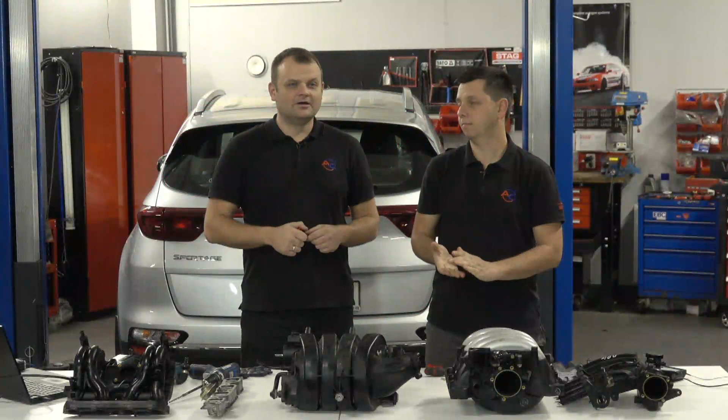The topics are the proper intake manifold nozzles montage, and the second one is the rules of the proper montage of the gas injectors in the manifold, outside the manifold.

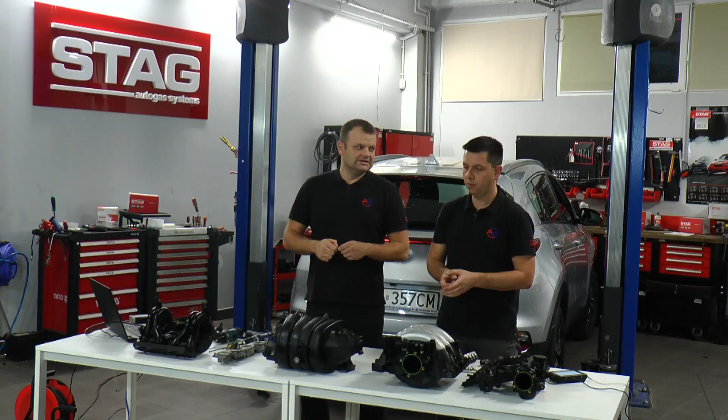And the first, the most important thing during conversion is that we need to deliver the gas to the combustion chamber in the proper way. What does it mean, proper way? It means that, depending on manifold construction, we should put the nozzles in the proper position, proper angle, and of course, LPG and CNG will be like a different way of thinking during this.

So what to do? Thomas, let's see slide number 2. Because it's good to look at the picture, because there are some basic parameters how to install, how to drill the nozzles. It is good to look at the picture and check. So at this moment you can see the two angles, angle alpha and angle beta.

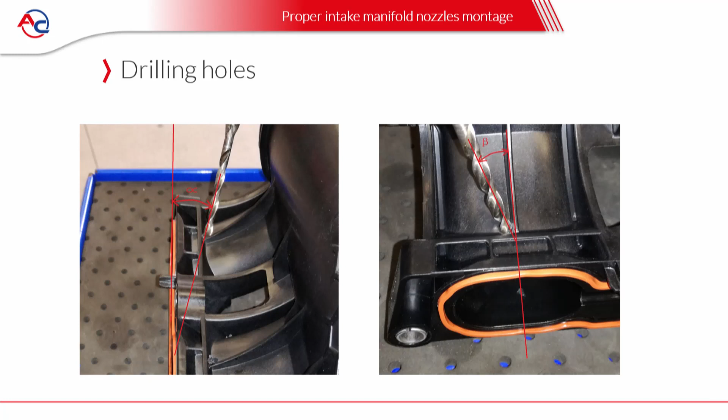These two angles are like the base rules. Let's talk about alpha. It's related to the position of the petrol injector in the manifold. As you see, this manifold is without the petrol injector. The petrol injector is in the head construction.

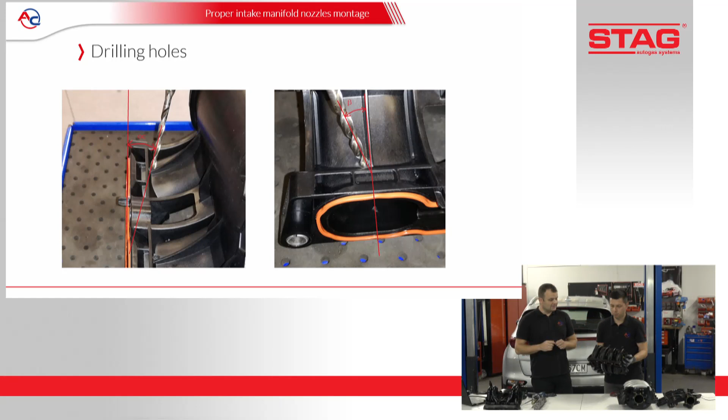So we should focus on the base rules, because in a situation when we have petrol injectors in the manifold, the nozzle in the manifold should be close to the angle of the petrol injector. So we have a manifold here. Let's have some small focus on it, please, just to show you the words that Marcin is saying.

For example, we have those places where we can find the petrol injectors right here; they are mounted on the manifold in this example. The first angle is related to the angle of the petrol injector. So this alpha angle should be very close to the angle of the petrol injector. This is like a first step. No matter if it is LPG or CNG gas, the angle is important.

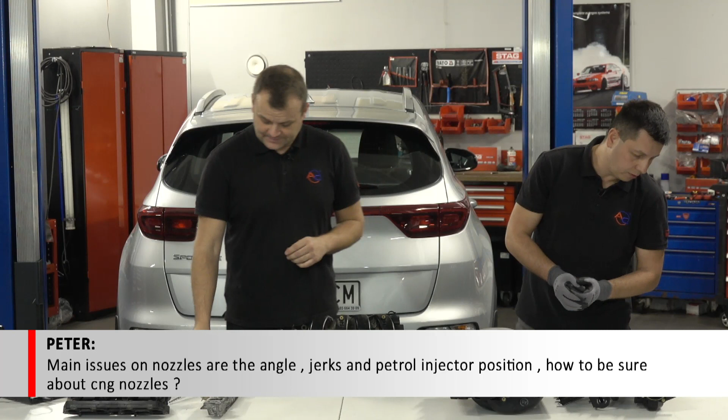The main difference between LPG and CNG is the place of the nozzle in the manifold. Before, we read one question. Peter is asking: main issues on nozzle are the angle, jerks and petrol injector position. How to be sure about the CNG nozzles? This is the difference between LPG and CNG nozzles.

In general, if you want to install the CNG system and you know how to install the LPG system, the main difference is in the distance between the place where you put the nozzles in the LPG system and in the CNG system. In general, LPG nozzles you should install closer to the head of the engine and the petrol injector.

But as Peter is asking about CNG, in the CNG system we should move the nozzles 10 to 15 centimeters from the petrol injector. This is a rule. Sometimes the customer has already mounted the nozzle, so there are some kind of software corrections that we can make in the software.

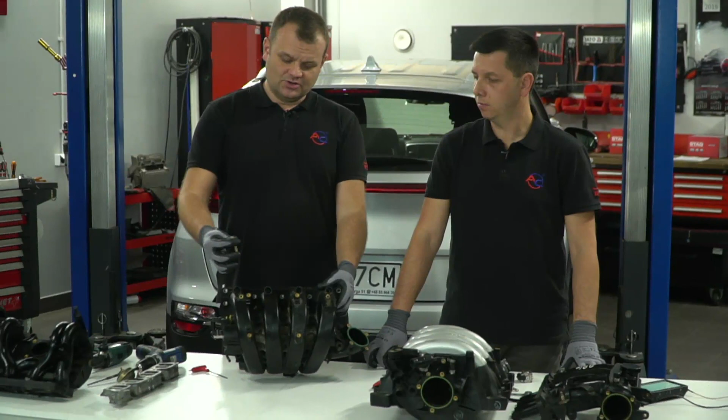But if the software is not enough and we still have some jerks, we should switch to a mechanical solution. So we should just move the nozzles. If they were drilled close to the petrol injector, we should move them 15 centimeters from the petrol injector.

Yes, this is a solution to prevent jerking during driving on CNG because of better mixing. Usually the CNG pressure is higher than LPG, and we have some turbulence when spraying the CNG, much more turbulent air inside the manifold. To prevent the jerking and get better mixing, just move the nozzles. Yes, that's the main answer to Peter's question.

Yes, this is the first step when we are talking about mechanical problems with the CNG system and installation of the CNG. So I think we'll present a small practical drilling of this manifold as an example. So what should we do at the stage of manifold drilling? First step, we need to analyze whether it is aluminum or plastic. If it's plastic, sometimes it's not necessary to dismount the manifold from the engine.

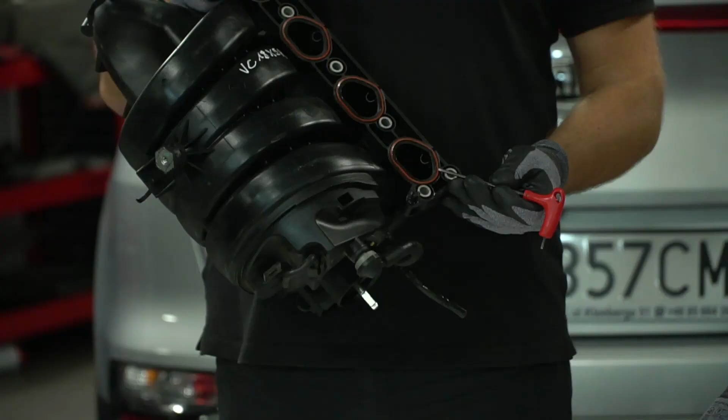But what is the reason why we should do this? Just an example like this. Without knowing what is on the side of the head, we are not sure during drilling in the engine compartment that we won't, for example, damage the sealing. That's why it's better to move it out of the engine compartment.

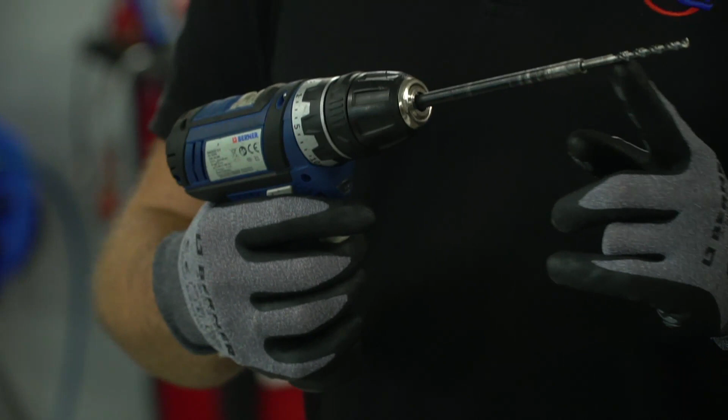That's right. And the second thing is there are some tools, yes? First of all, we need to drill, right? So what we should have is a drilling tool. The drilling tool, as you see, is untypical. You cannot buy this kind of drill in the shop. This is a custom made drill. This is the typical drilling tool, and this was added in a special workshop.

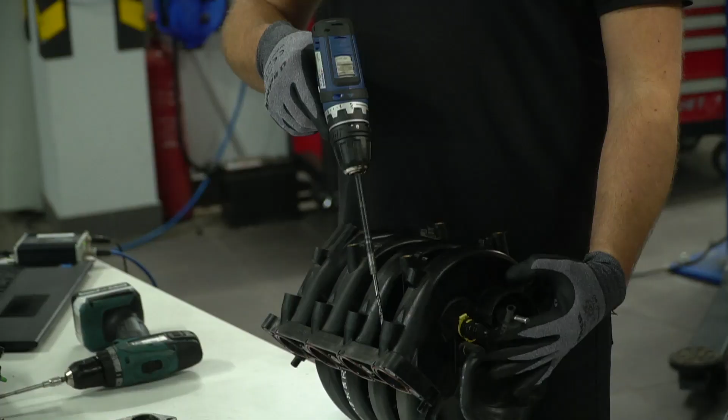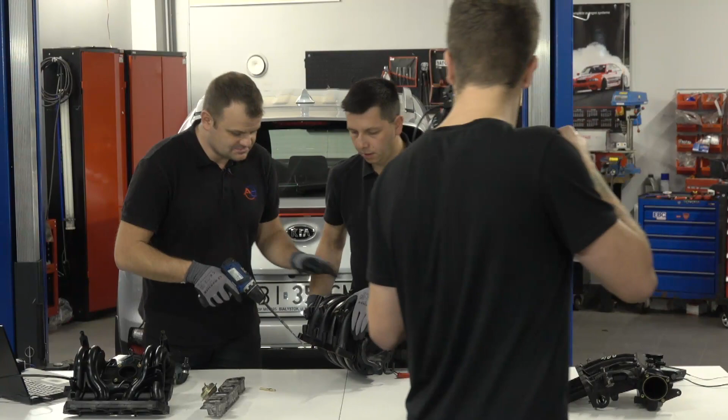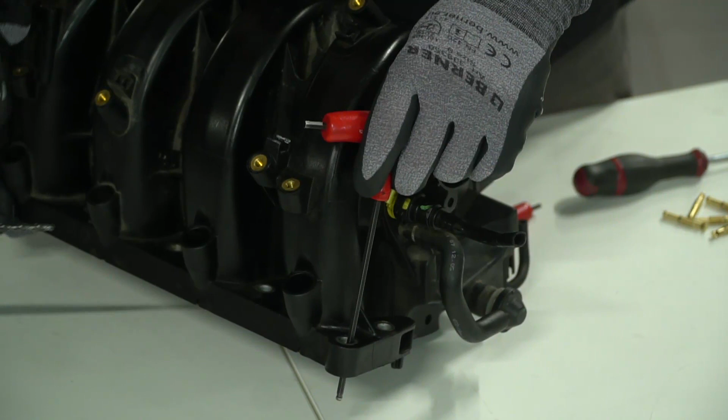Please, Tom, hold the manifold. Okay. Another thing you need to think about is what will happen if we drill here. Keep in mind that after drilling, you should also put the nozzle in this place. When we have a screw here to mount the manifold, if after drilling we put the nozzle on the left side, for example, there will be a problem mounting the manifold back to the engine. That's why we should go on the opposite side and drill.

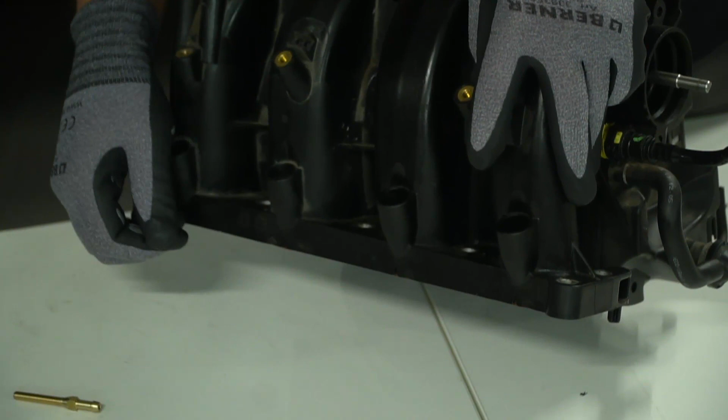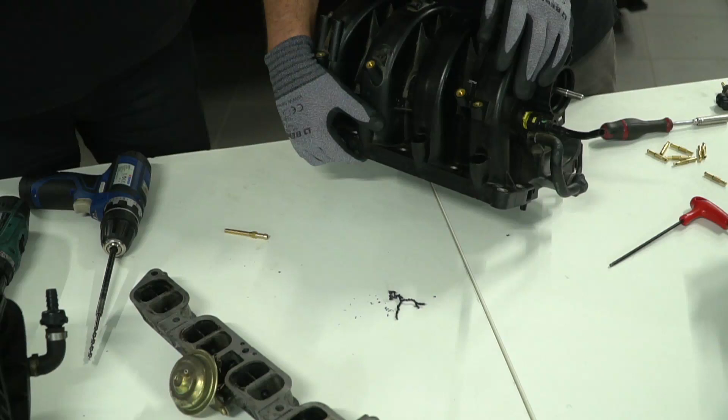But if we drill aluminium, we'll show you the aluminium dust. It can create a lot of damage in the engine, related to the catalyst, even clogging on the valve seats or the valve, and a lot of issues with starting the engine after this. That's why, again, remove the manifold from the engine. So right now we have a hole here.

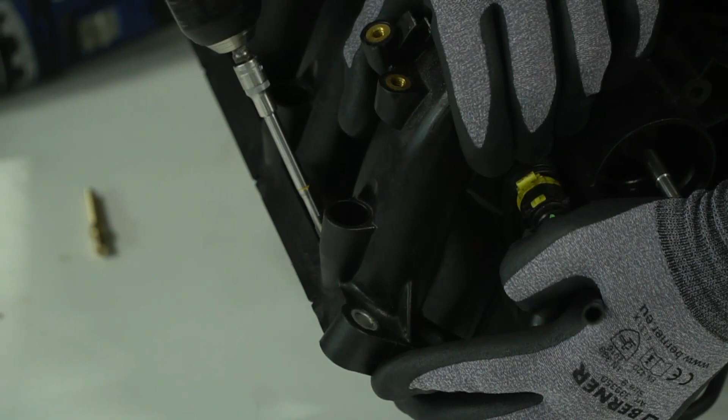Now we can try to put the nozzle here. But to put the nozzle in, as you can see, the nozzle has a thread. So we need to cut the thread in the manifold. Step back, slow down the machine from second gear to first gear to have slow movement, and then at the same angle, slowly make the thread in the manifold. Move it right, then the opposite side, take it back, and we have the thread in the manifold.

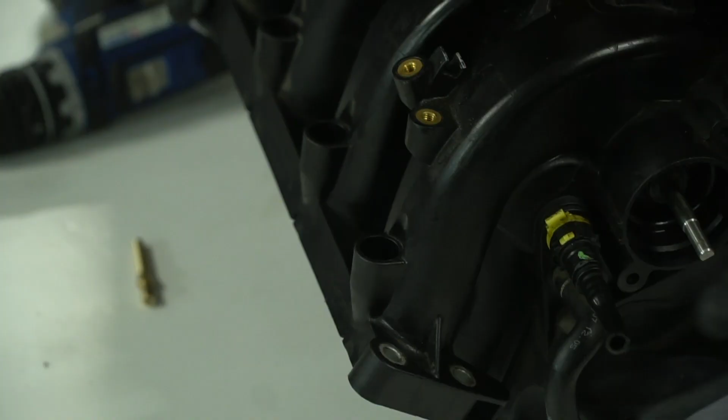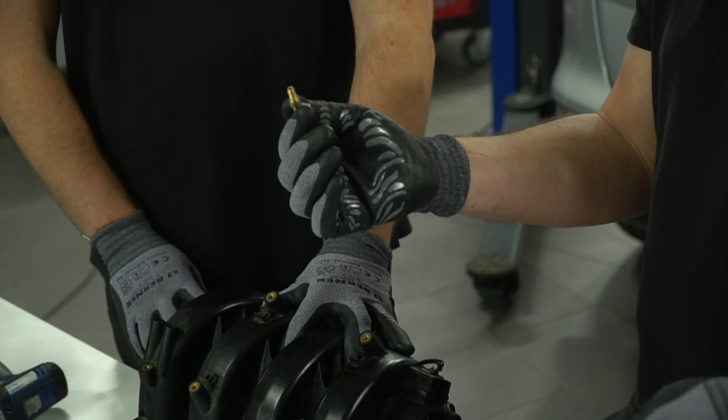That's right. So now, when we have the thread and the nozzle hole here, we can use the nozzle. As you can see, we prepared different types of nozzles. This is the typical nozzle you can usually find on the market, and it is also included in many injector kits. But we can also have nozzles like this one. As you can see, it's much longer. It depends on the construction of the manifold.

You can use the shorter one or the longer one. And the third one you can also find on the market is a directional nozzle. We will also tell you later more details on the different solutions.

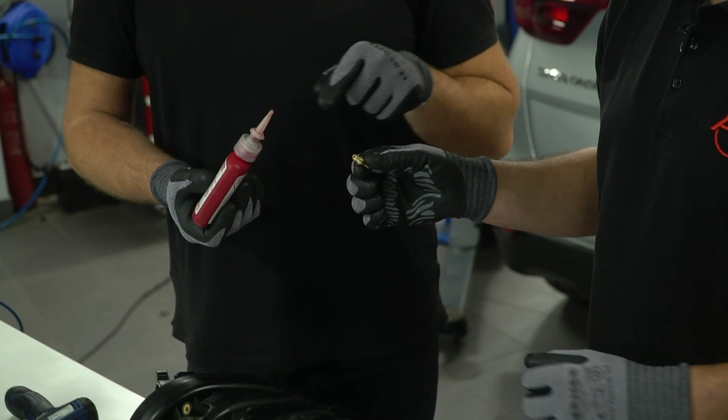And the next tool we need is a thread sealing liquid. Yes, it is very important to use this liquid as the first step, but not to overfill it. What is the reason? Because sometimes if there is a lot of liquid when mounting the nozzle in the manifold, we can clog the nozzle flow.

And then we made the installation. We think that everything is okay, but suddenly the car has a malfunction, the engine is not working properly, some misfire on one cylinder, second, third.

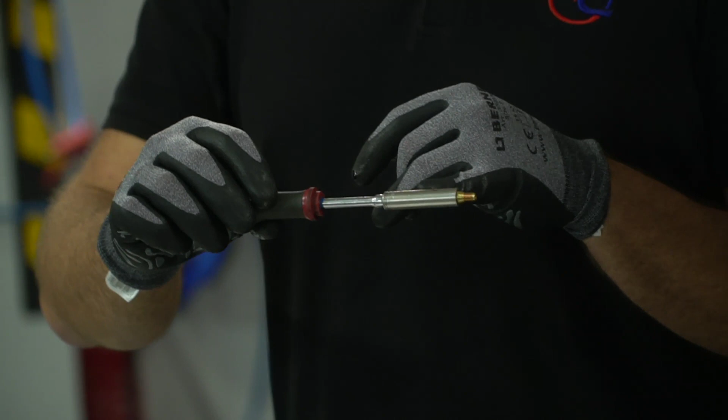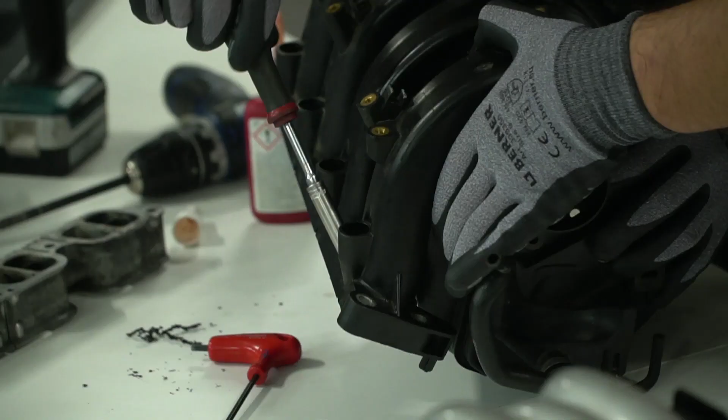Then for the nozzle we should have an 8mm tool similar to this, and if we have the sealing liquid on it, can we have a focus here, we can easily mount the nozzle in the manifold. And don't use too much torque on the screw, because with this type of plastic body we can destroy the manifold. We can crack the manifold.

So this kind of tool is useful, because if you use a wrench, the torque can be too high and we can crack the manifold. Better is to use a screwdriver-type tool. And if you feel gently that the thread is going to the end, it's finished. That's the rule. So we can show you the focus, how the nozzle is mounted.

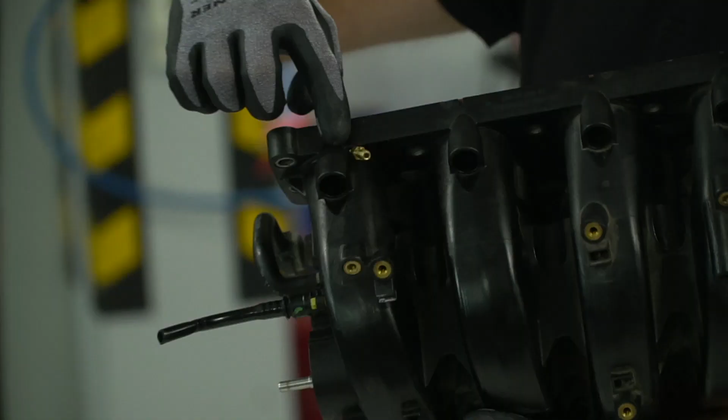And on the opposite side, if we have a focus, the output of the nozzle is very close to the output of the petrol injector hole, you can see. Okay.

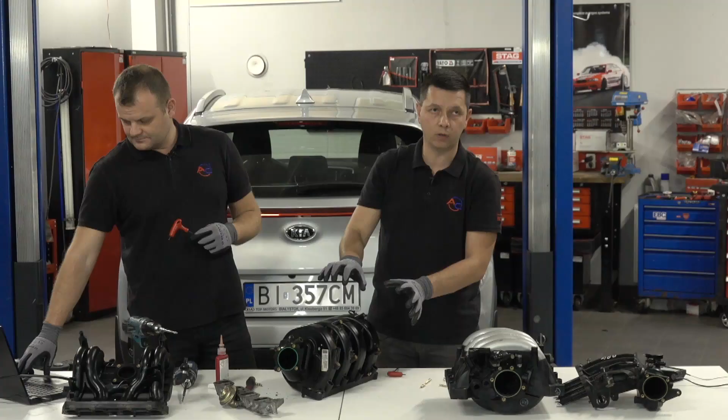When installing the nozzles in the manifold, it is also important to check the whole construction of the engine, because sometimes the manifold has a plastic cover on it. So it's very important to check the proper position for the nozzles, so there is no problem putting the plastic top on the manifold. It's one of the things you should take into consideration.

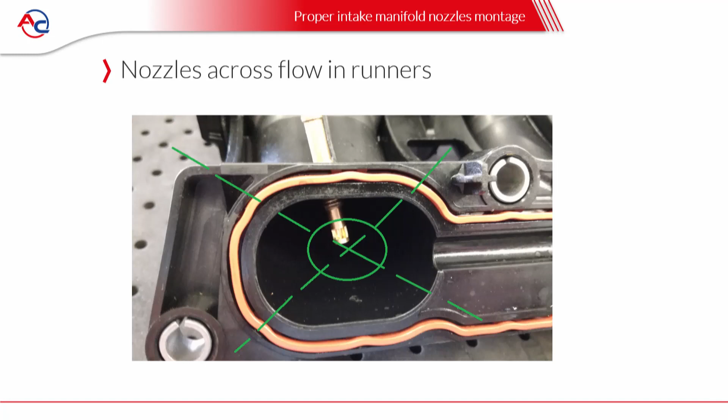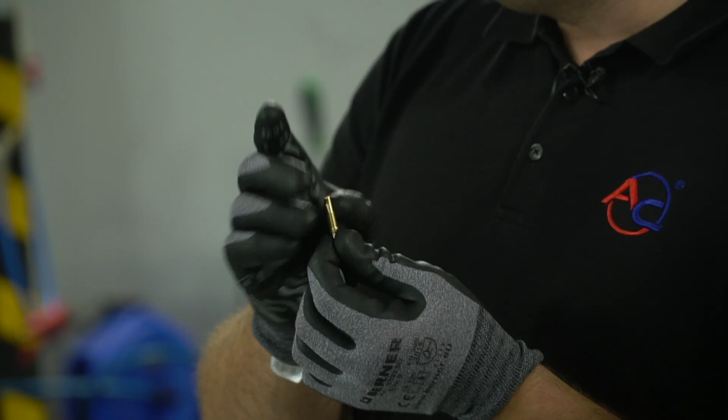On the screen, we can show you one more screen related to the position of the directional nozzle. As you see, the directional nozzle has a small output, but only on one side of the construction. If you see the screen now, please. The output is as close as possible to the middle of the geometric construction of the runner. As you see, it's very close to the middle area.

And the reason is that in the geometric middle of the runner, the flow is more laminar. Close to the border, the flow is more turbulent, and the mixing is not so smooth.

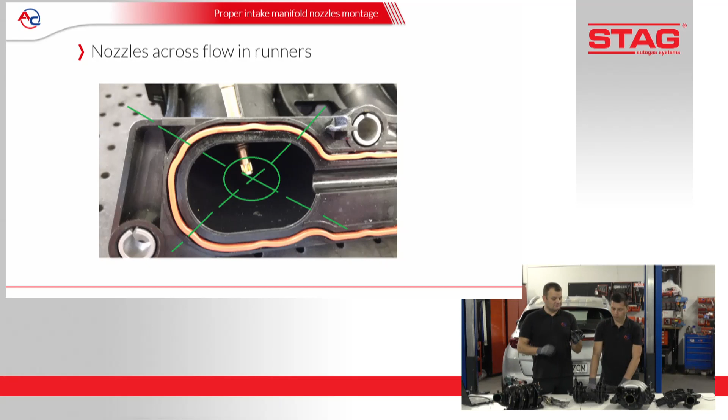That's the reason, if possible for an engine like this, because the manifold on the screen is from a direct injection engine, where the petrol strategy is more complicated, so to prevent jerks and have better mixing, in those kinds of engines use nozzles with a directional hole output.

And just to show you, what do you think, Marcin, we can make a hole in this manifold, for example at 90 degrees, and install the directional nozzle to see how it looks. So we have the manifold right here. We have taken it off the engine head. As we can see, there are no flaps here, and no petrol injectors, that's right. So we decided to put the nozzles in this manifold.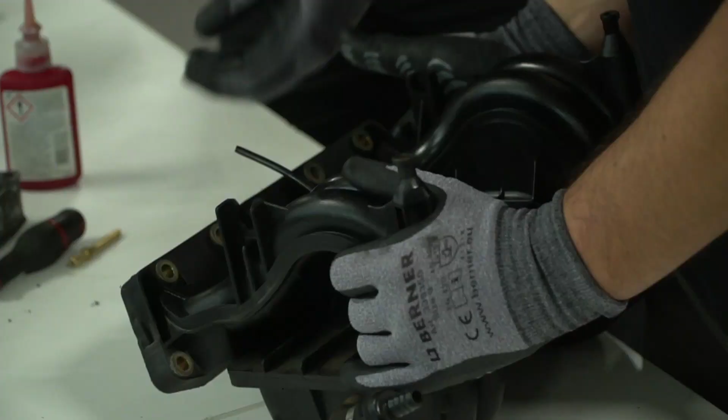Okay. Because of what Marcin said just before, maybe we can use the directional nozzles, just to show. Okay, let's do it. Let's drill it. Okay, let's try it. Okay, and now we make the hole. The second thing is to make the thread.

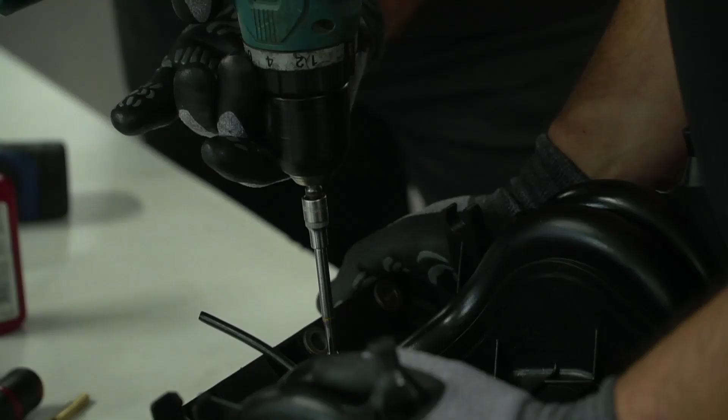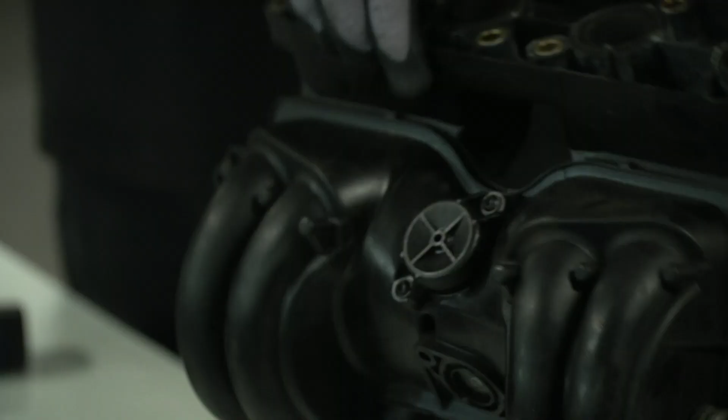Okay, and now just to see the example, if we want to put the standard nozzles here, right now without the glue, just to show you what is the difference, right? This is only the example. As you can see in this situation, it doesn't even show. Just a little bit, and the direction. Maybe show it for the camera, how it looks.

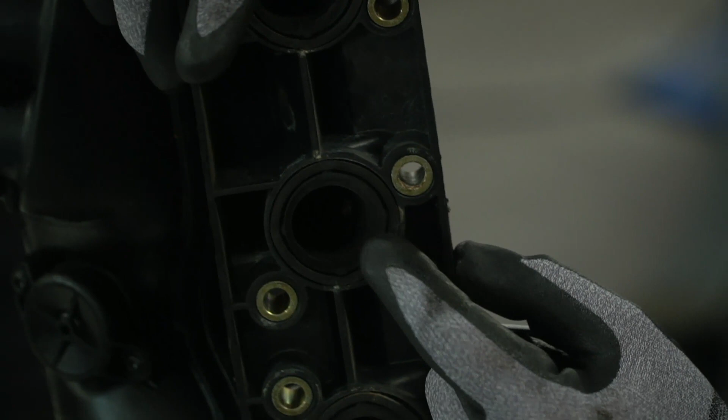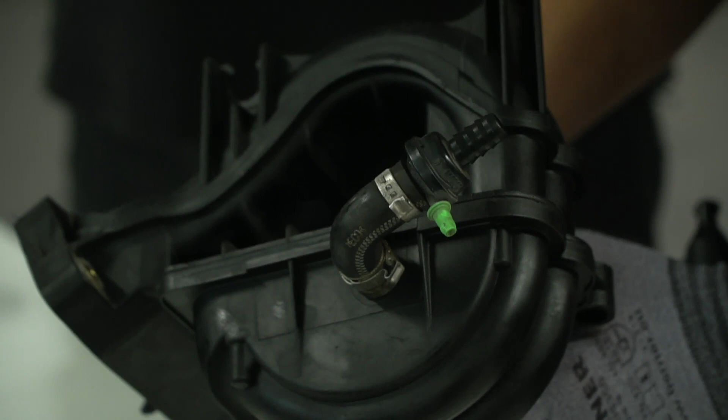Yes, here we have the nozzle inside. Okay, so the injection of the gas is going to that wall, right? It will hit the wall, and after hitting the wall go out. So in this situation, we can try to install the directional nozzle. And before installation, show how the nozzle looks from the top, please.

So right now we have the nozzle that looks like this, and from the top, as you can see, there is a little cut, a small mark on the nozzle. It is very important, because this mark on the top of the nozzle has the same direction as the hole here. So when you install the nozzle, you can easily find the proper angle and position. You will be sure about the output of the nozzle.

And once again, we should use the wrench. Which one is this? This one. Take it on a wrench. Then I will glue it and you will screw it. Okay.

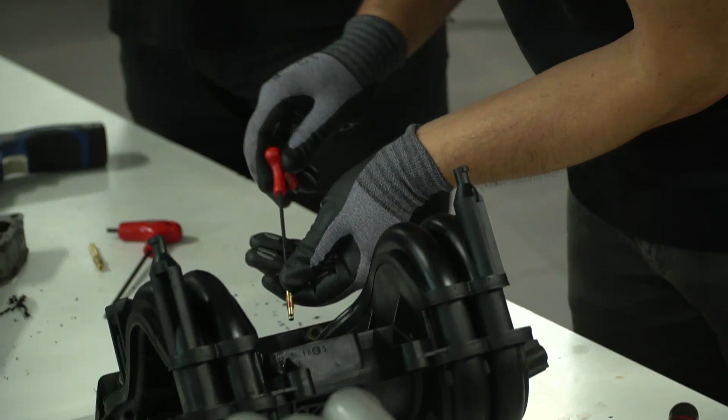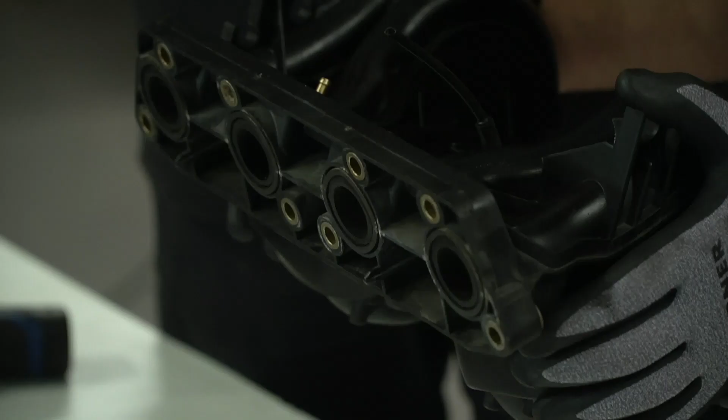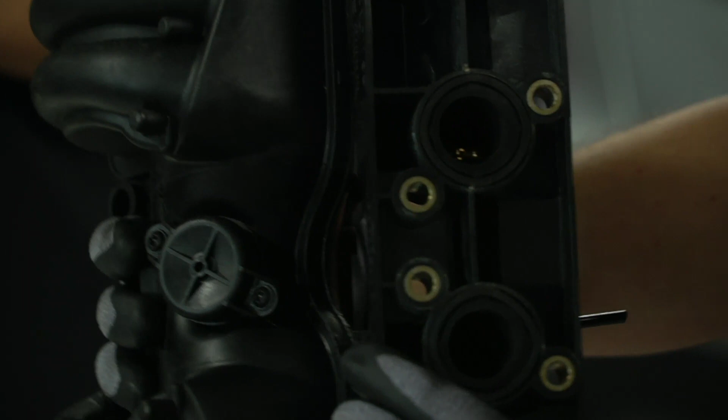but when you look down here, you can see that output with the proper angle. And right now, when the system injects gas, the direction of the gas will be just in line with the runner. So we are very sure that in this situation it will be a very good direction of gas flow.

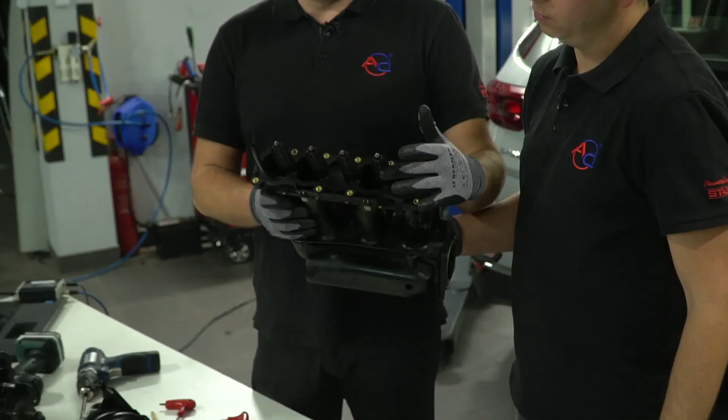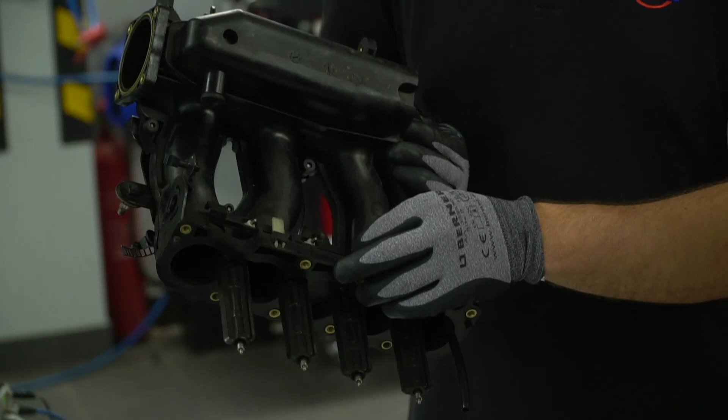So these are, let's call them, more simple solutions. Then we can step to a little bit more complicated manifold, this one. What is unique is that at the airflow outputs there are additional flaps inside. If you look from outside when it's mounted in the engine, there is no sign of these flaps because they're built into the back of the manifold construction. There are extra handles there. From the top we cannot even see the flaps inside.

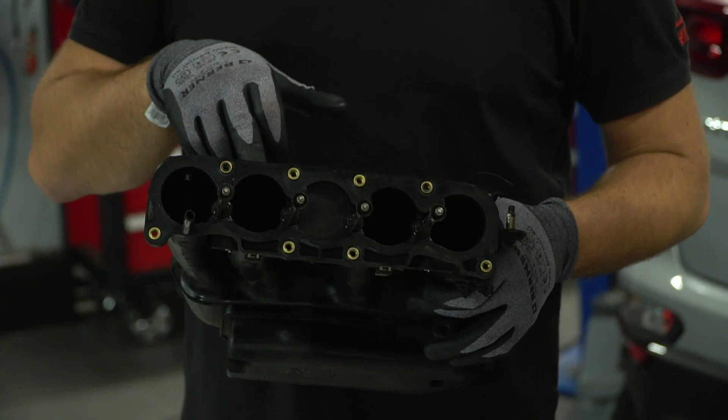So if you remove the manifold you can see the flaps. If you put typical nozzles here, there will be output of air together with mixed gas. There is a high risk that if the flaps are open, we'll be mixing the gas of all 4 cylinders with air. We are 100% sure this engine will not work properly without this additional knowledge. Probably the engine will not even run stable at idle, and there will be a lot of jerks and more problems.

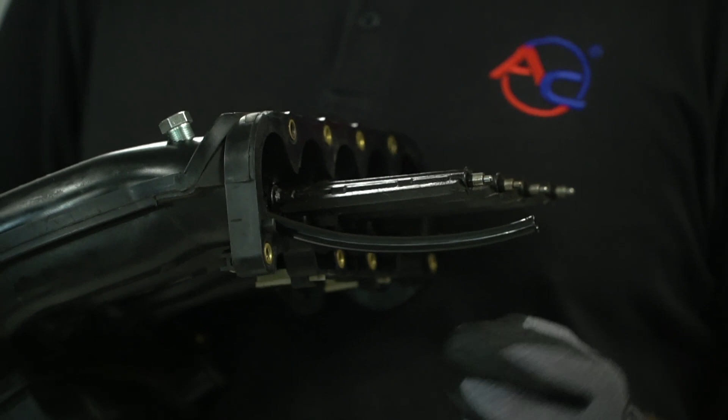So after dismounting the manifold, the one proper solution for this engine is to mount additional plastic extenders for the nozzles. Then, after mounting this manifold, the gas flow through this piping will go as close as possible to the intake valve, and there will be no mixing; whether the flaps are open or closed, the gas will flow out through these plastic nozzles. In many markets we can buy these plastic extension nozzles.

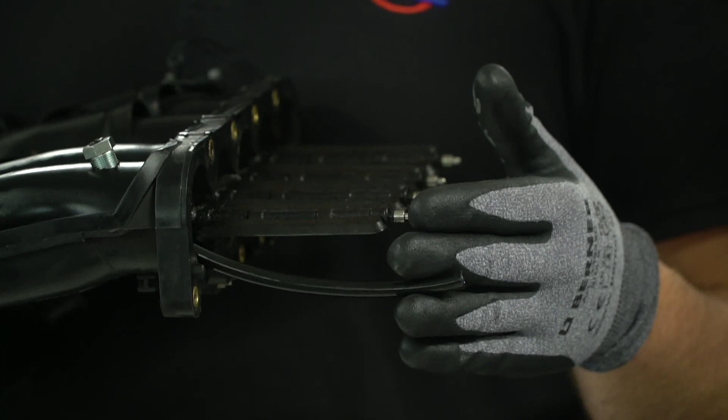Some engines have no vacuum in the manifold, like Valvematic or Valvetronic engines in Toyota and BMW. In these cases we also suggest using this kind of nozzle, because without vacuum in the manifold, with typical nozzles, we sometimes see jerking, even on LPG. With the plastic nozzles mounted in the manifold, we can fix these issues easily.

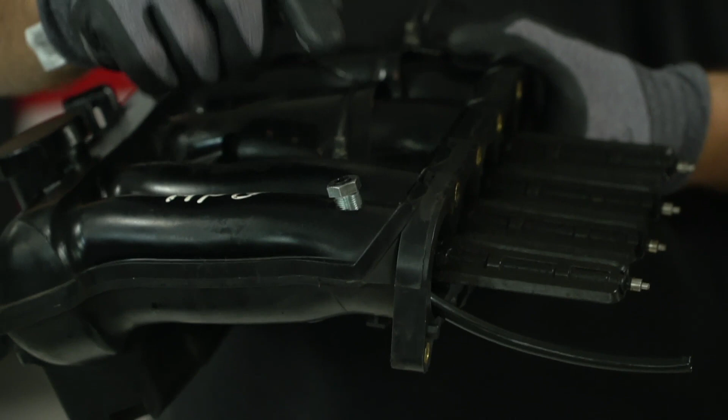It's not complicated, and not so expensive: €1-2 maximum per nozzle. So in the overall cost of installation, €1 or €2 is not too much. Also, the work during installation is very simple: just drill the hole, use the standard metal sleeve, put the plastic pipe inside this metal sleeve, tighten it, and then connect the pipe from the injector to this nozzle using typical rubber hoses, nothing more.

Yes, that's right, and it's also important that you can change the extension by cutting, depending on how long it can be. These pipes can also be slightly modified at high temperature, so we can use an external heat source and change the shape of this plastic pipe a little. That's right. It's flexible, so it can be easily mixed and fixed, like this.

This is a solution. So let's follow the next steps, which are more complicated. We can show you a very short manifold element from a Toyota 2-liter engine. From the typical layout you don't even see that inside the manifold we can meet the flaps. Each cylinder has a small flap. But if you see it in the engine compartment without taking it out, you are not sure in which place it should be mounted. Every cylinder, as you can see, has two lines or rows, where the air goes through two runners from the manifold to the engine.

And here, just like Marcin said, if you do not take off the manifold, you can think, maybe we can drill here, the second one maybe here, and maybe here. So first, we can break the flaps, of course. Or we can block the flaps, because if we drill and put the nozzles here, the nozzle can block the flap. So what to do? After dismounting, we should choose a proper runner. As you see, there will be runners number 2, 4, 6, 8. There will be 4 runners.

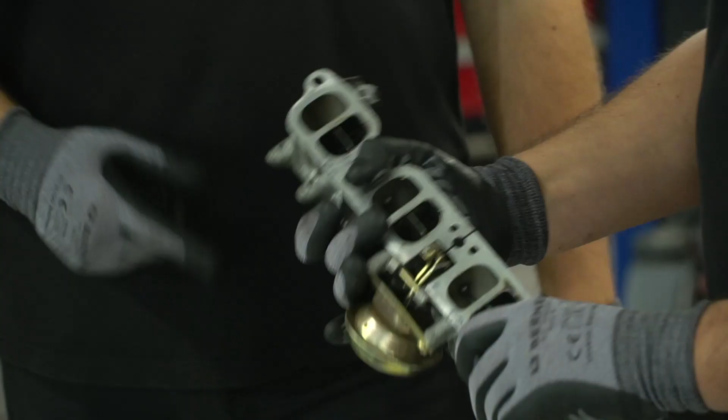What to do? We suggest using direction nozzles in this case. And let's try to generate dust, aluminum dust, and you will see how much dust will be generated. Can you hold it? I will do it. Yes, of course. Which one do you choose? Maybe here? Okay, let's try. Let's see this. Without dismounting, see what we will generate, and we will have it in the engine. To prevent it, dismount the manifold. Then, the same rule, we should make a thread.

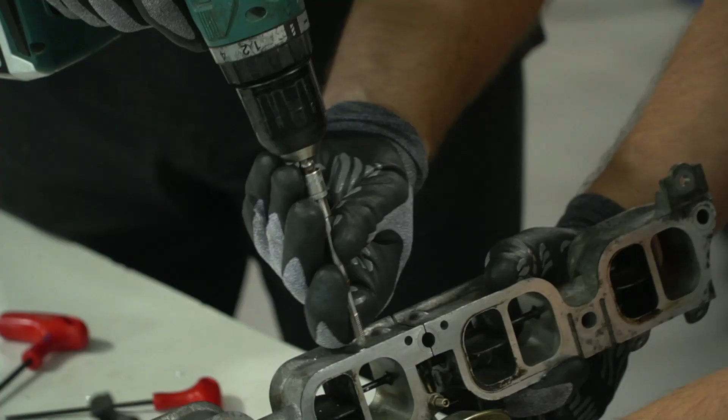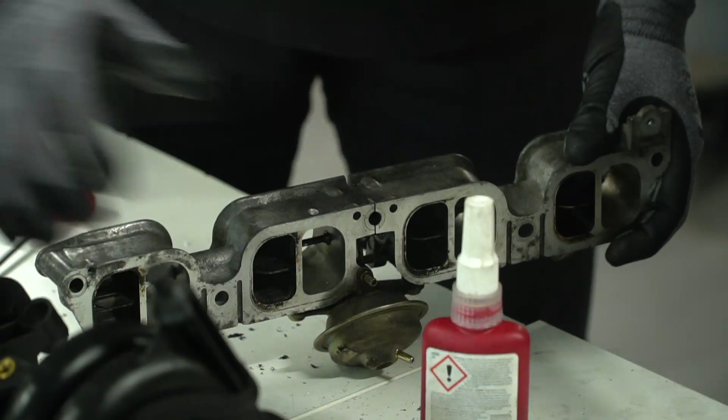Again, as you can see, during making the thread you still have the dust that is here. So dismount the manifold. Okay, then I will hold. You can install the direction nozzle. Once again, we need to take some Loctite. Just remember to close it.

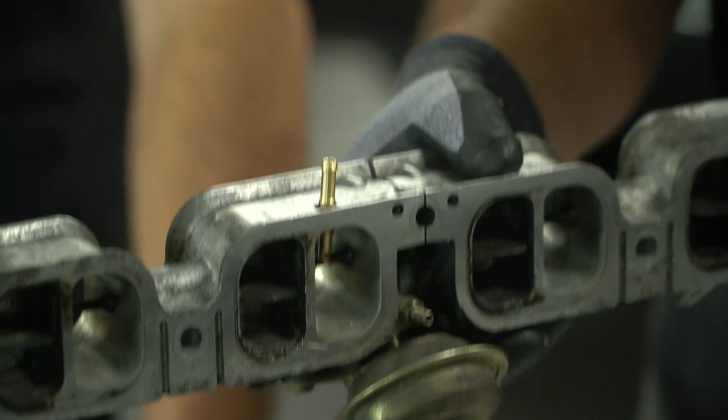Okay. And the same rule for the direction of the nozzle: you should put the markings on the engine side. As you can see right now, there is a directional nozzle here in the manifold, and the direction of the gas flow is the same direction that the air is going from the filter, through the manifold, to the head of the engine. So again, the advantage of the direction nozzle is you don't need to take care a lot about the angle. Because it is straight in the runner, the gas output is inside the runner,

in the geometric middle of the runner. So there are 2 or 3 things you don't need to think about, because the output is in the middle of the runner. As you can see, if you put it in the wrong place, when you try to close and open the flaps, that nozzle will be a problem for the proper working of the flaps. Exactly. So from this, we can switch to a V6 engine manifold, this big one. What can be an issue on V6? Of course, the issue can be the same.

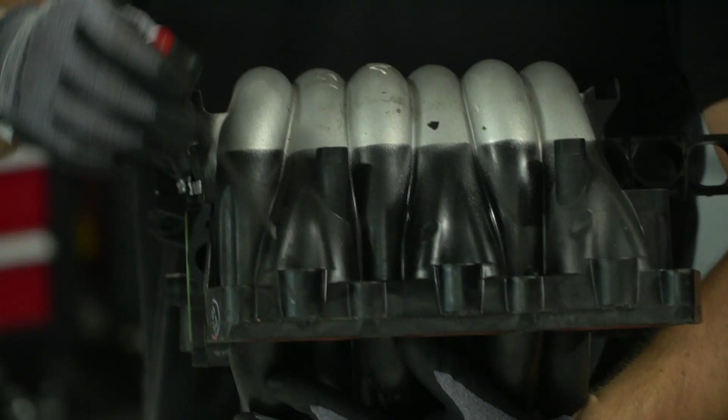We can meet flaps, we can meet double flaps in the runner, and sometimes we meet another problem. Let's see this. If we have a 1-cylinder runner, we have a second runner very close, like here, and sometimes these 2 runners can be in one surface. Here, as you see, there is one surface with this angle and a second surface. But sometimes the surface is flat, in the same line, and during drilling we can damage this runner, and this runner goes to the opposite bank.

Yes, this is bank 1, cylinders 1, 2, 3, and bank 2, cylinders 4, 5, 6. So sometimes during the drilling we can meet an issue with destroying the wall of another cylinder runner. This can be an issue. So what to do? We need to focus on the 6-cylinder runners and manifolds like this. So drill it again close to the petrol injector. Then we are also sure that we cannot have broken another cylinder runner, like here.

In this particular manifold this is simple, because we see the runners. But sometimes the surface is flat, and during the drilling we can destroy another cylinder runner. This is a main issue in V6 engines. And another issue is that there is a lot of work to do if we have a V6 and we are using injector rails, not single injectors.

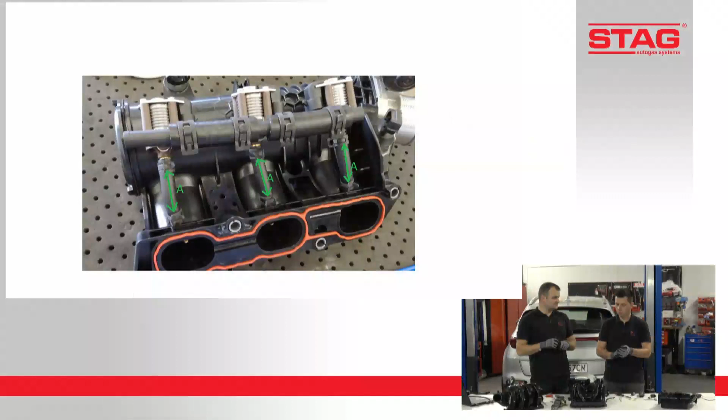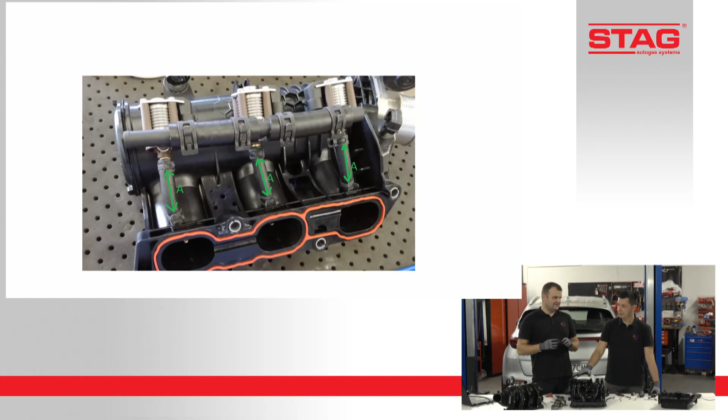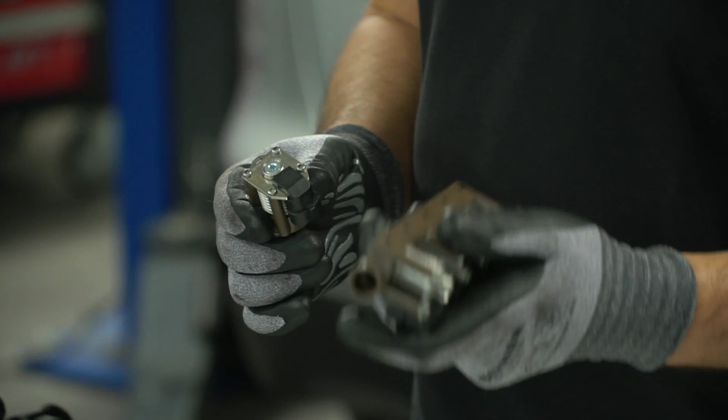So again, we need to repeat it: A means that all pipes should be of length A, the same length for each pipe. And since we are talking about the installation, we can say some words about the position of the injectors, because it's also a very important thing. As you can see, we have access to the injector rail and a single particular injector.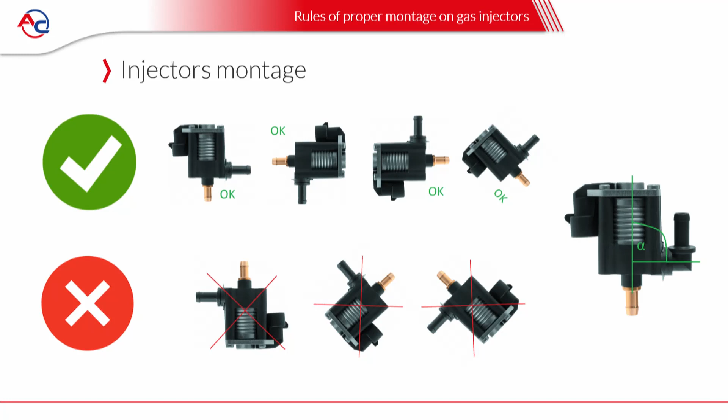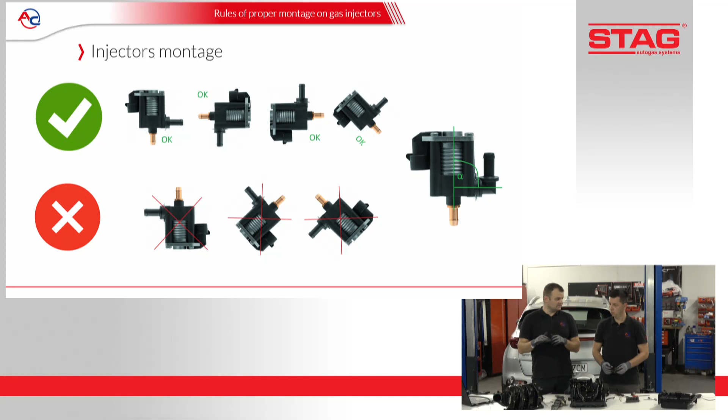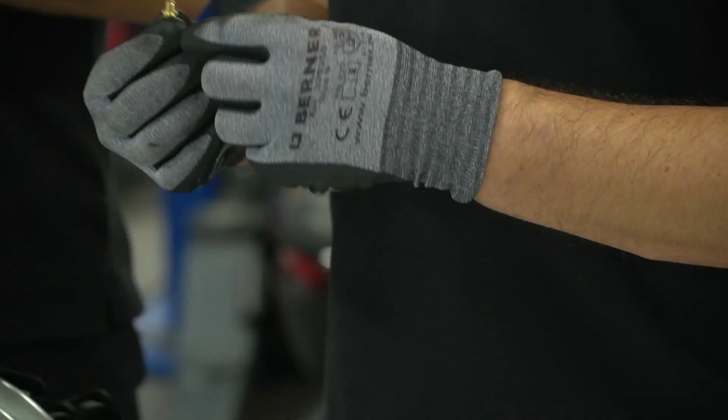Even at an angle of 40, 50 degrees, no matter, the output should be down or maximum 90 degrees from the horizontal position. And if you are using AC injectors, remember, if you already installed the nozzles to the manifold, to make proper holes in the nozzles that go to the injector, because in standard there is a small hole. Here 1.5 is the default, but depending on the power of the engine you need to drill a hole with a larger diameter.

This information comes together with the gas injector rails, like a manual, so you can find the table with the diameters depending on the power. We are talking about it because very often customers ask us what diameter of the nozzle they should drill. And I'm asking, did you read the manual? What manual? Where is the manual? Inside the injector box. Oh, really? Yes, it was, at the bottom.

On the bottom. Yes, on the bottom. So sometimes the answer is just read the manual, guys. Everything is included with the gas injector rails, just in the box. That's the rule. And someone can ask us why the injector cannot work like this.

The main reason is that if we put the injector like this, all the deposits, because the filter in the system is not a wall, it's not a concrete wall, it's a filter. It means that there are some small particles, particulate matter, that can go across the filter. And if we put the injector like this, all the small particles, even small liquid droplets, are going inside the piston chamber, in the cylinder of the piston. Sometimes the guys call it the plunger, not the piston.

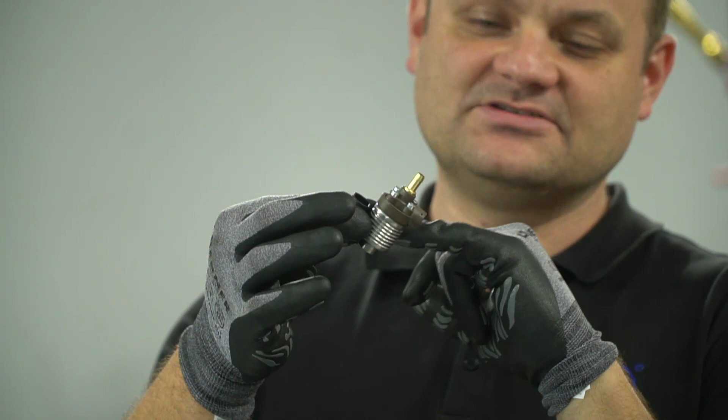And because the deposit stays there, there will be a moment it will be clogging the piston movement. So to prevent this situation and extend the life, stability and parameters of the injectors, we should have it like this, or the best position is like this. So all the deposit is going to the engine, but it doesn't cause any issue in the engine because it's a small liquid. It can be burned in the engine chamber. But this position will make the life of the injector much shorter.

And at the end of our presentation today, we can show you some examples that we already found in engines. We want to show you the wrong installation of the injectors, right? Exactly. So on the screens here, you can see how not to install the injectors and the piping. First, what you can see: different lengths of the pipes, and very long pipes. This looks like from the Earth to the Moon, so it's a little bit too long. The engine will think, where is my fuel?

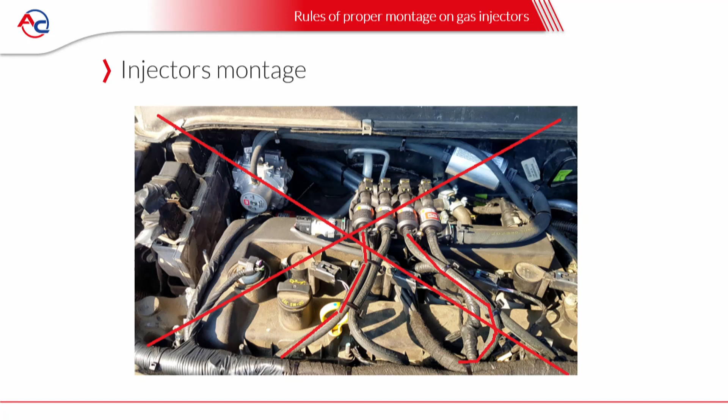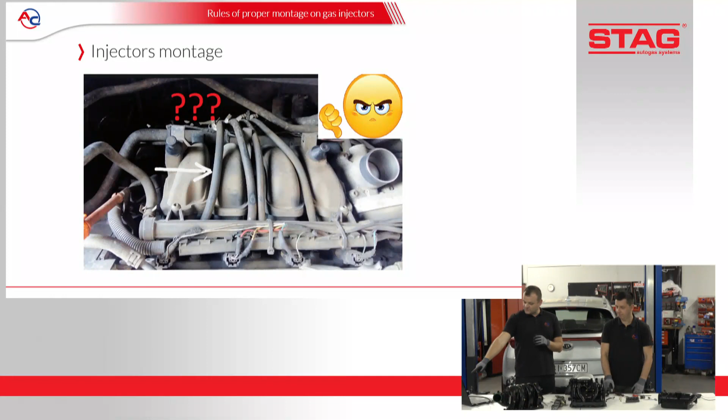And on the next screen, there are question marks. Why? Because somebody hid the injector somewhere. The injector lies outside the engine somewhere. That's why the question is, where are the injectors? And as you can see on the screen, the injectors are mounted opposite, so the nozzles are going up. It means that the piston is going down. All the dirt is inside the injectors. It will kill them very shortly.

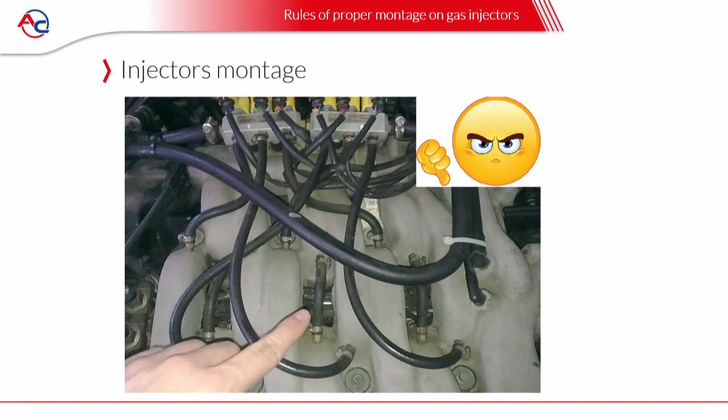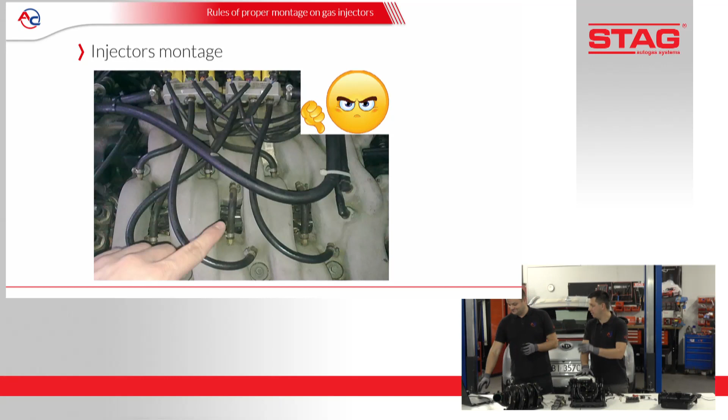And the next screen is NASA, Star Trek, I don't know how to call it, because of the connection between cylinders. I think somebody was trying to make holes. We told you about the wrong holes in the wrong runners, and you can see someone did this here on the screen. He did wrong drilling, and then he tried to fix it using this small piping. Let's say the idea is quite good, right? So Star Trek, yes.

This is very unique. What you can see is a 6-cylinder engine. And in this 6-cylinder engine, someone put a 4-cylinder rail and then added 2 different injectors, because he probably had just 4 injectors with the 1 rail. And with these 2 other injectors, I guarantee you that this engine cannot work properly. 110%, it wasn't.

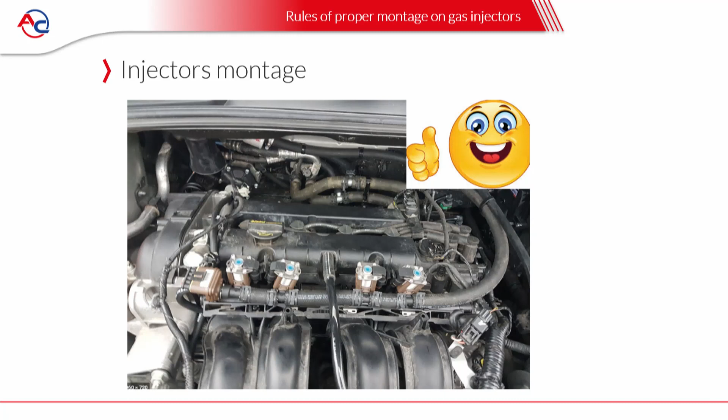So let's check some good installations. As you can see, this is how it should look. The injectors are clearly mounted horizontally. The position is proper. Very short piping from the injectors to the nozzles in the manifold. Very smooth looking. In engineering, if something looks good, there's a high probability it will also work well.

This is also W03 injectors mounted in a Toyota engine very smoothly. And then you can see W02 injectors, how they look properly mounted. Again W01 mounted with short pipings, very nice looking.

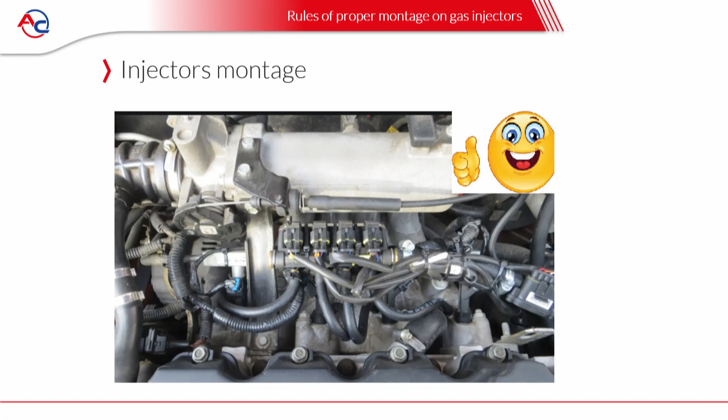Just remember, if you look at this screen, it's a normal connection. But sometimes, if you do not have the opportunity to keep the length of the pipes the same for every cylinder, you can also mix the connections between cylinders to have the length exactly the same. Just mix the sockets. That's all.